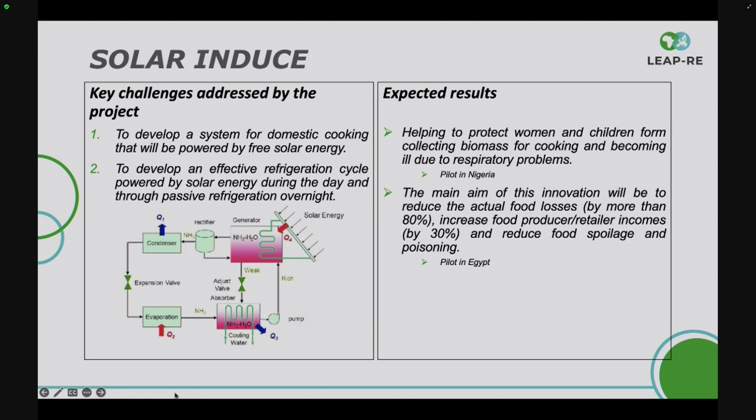Regarding the other challenge, about the solution for the cooking technology: the project is working on an already well-known solution, but the innovation here is to reduce the cost and increase the efficiency of the product. Also, one of the challenges is to design a cookware solution that increases efficiency, reducing the thermal losses of the cookware when using those appliances.

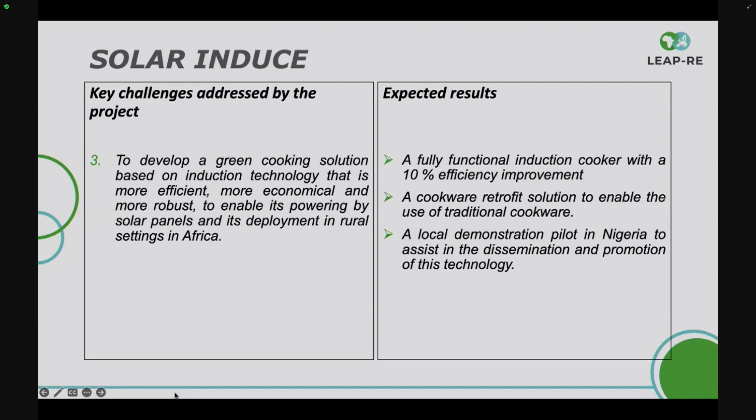When talking about what we have done in the project, I'm afraid the project has had a big delay, mainly due to funding issues for some of the partners. As I mentioned before, as a university in the UK, we don't get any funding, so we are collaborating in the training of some of the South African partners. The knowledge about the preparation of some of the products we are going to use for the refrigeration was done here in the UK.

The partner in South Africa has been working on the preparation of the mucilage using dika nut and similar crops, but they have faced some issues in finding the raw material, because it's mainly found in Nigeria while they are in South Africa. But they are still working on the preparation of the mucilage and the hydrogel.

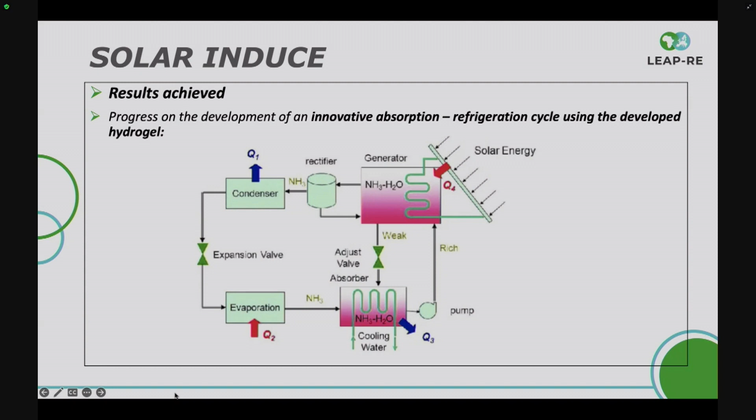Regarding the cooking part, there is no issue in the design of the solution. The partner from Spain is working on new materials to reduce the cost of the cooktop, and also working on and testing part of the off-grid solution, because generally this kind of solution works with AC current, so they are going to make modifications to reduce the cost and integrate it with the off-grid solution.

The main advance here in the project is that they have been testing new plastic materials to use in the cooktop instead of the traditional glass. Those plastics are currently being developed and tested - thermoplastic instead of glass - and how it's going to integrate other components like the touch control and those kinds of things for the cooking system.

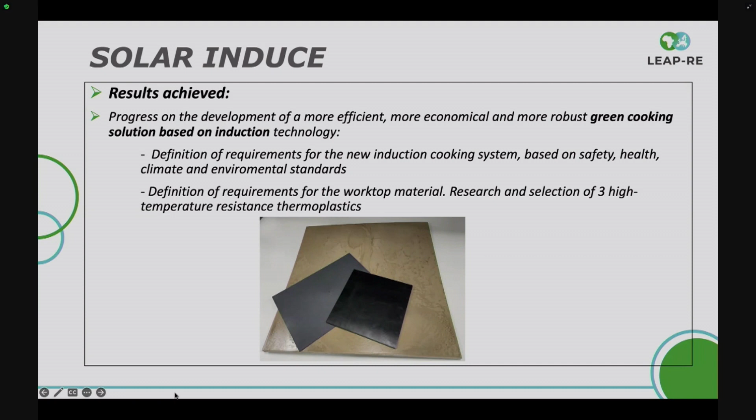Okay, so here in the picture you see the three kinds of thermoplastic, and they are currently tested for the induction cooking. Also in Spain, the partner is already testing some of the modifications of the design that they propose for this cooking solution.

I didn't mention, but the cooking solution is going to be in induction, not radiant solution. In general, induction is higher efficiency, and for that reason it's important to have the development of the cookware adapters, which is going to be developed in part by the Nigeria partner in this case.

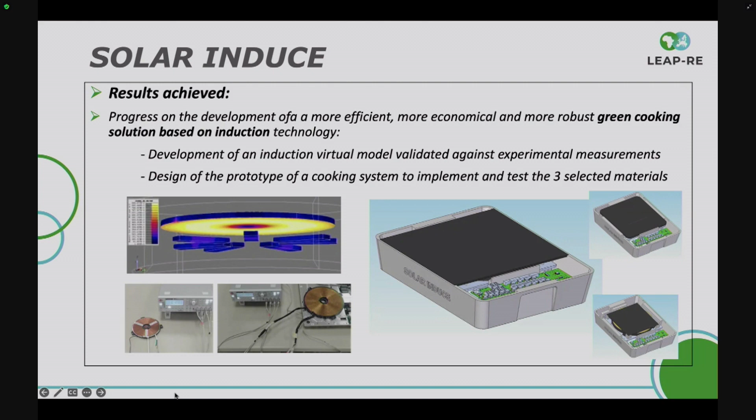Regarding the problems, as I mentioned before, there are some issues. We have an important delay in the starting of the project. This was the first one, because one of the agencies funding the coordinator was having an important delay. So initially the starting time, the kickoff of the project, was delayed more than 6 months. This is because of the coordinator funder.

Then after the kickoff—well, even before that—we already knew that UK will not receive any of the funding. So some of the tasks that were originally for UK could not be developed. We are trying to collaborate, but there are some limitations obviously. Another important issue in the project that is still not resolved is the one of the partner in Egypt—they don't have the funding. So there are still some administrative issues with the funding agency.

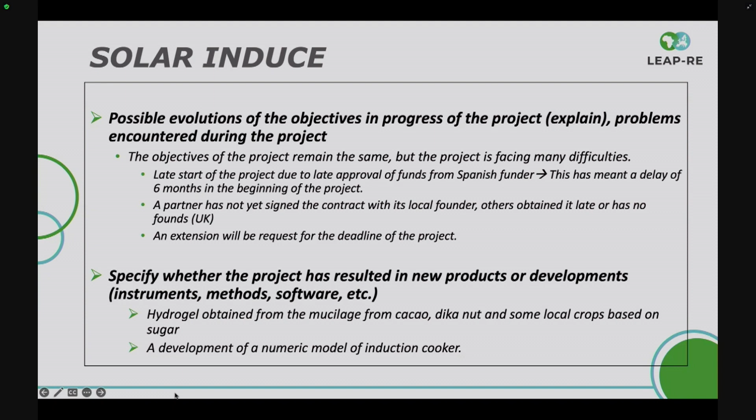Mainly due to the delays in the starting and in the funding part, we are going to request an extension. We are expecting to have the results of the project in 2025 instead of next year, but we are confident that after those administrative issues are resolved, we are going to be in a good position to complete the project according to the objectives.

Also, based on the project, we are happy that there has been some new networking and collaboration. The partner from Spain was in Pretoria, and they have developed some new collaboration there. Based on that, we have presented 2 different projects working with sub-Saharan countries—Kenya and Angola—and we were also working on that. It's still just presented, so that's not confirmed yet, but we are working to develop new collaboration based on the LEAP-RE project.

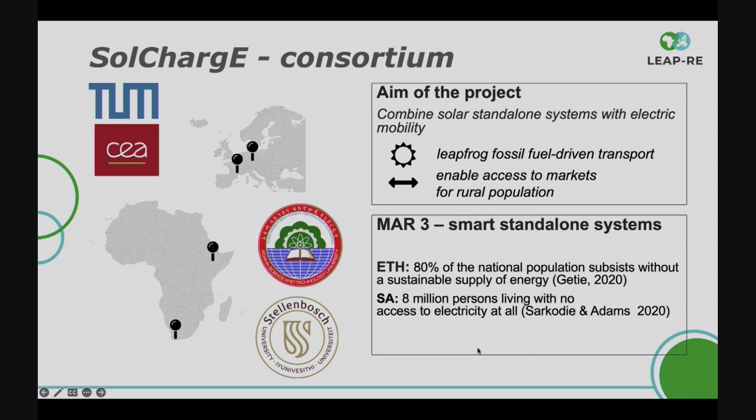Our project is related to MAR3, Smart Standalone System, with the big problem shown here by 2 examples from Ethiopia and South Africa. In Ethiopia, 80% of the national population is without sustainable supply of energy. And in South Africa, it's 8 million people without access to electricity at all.

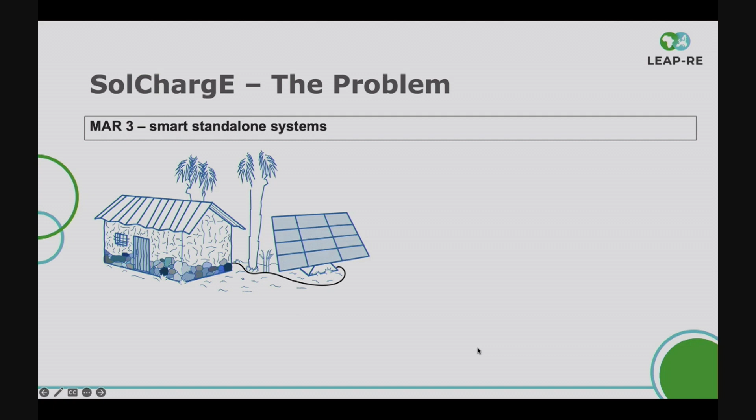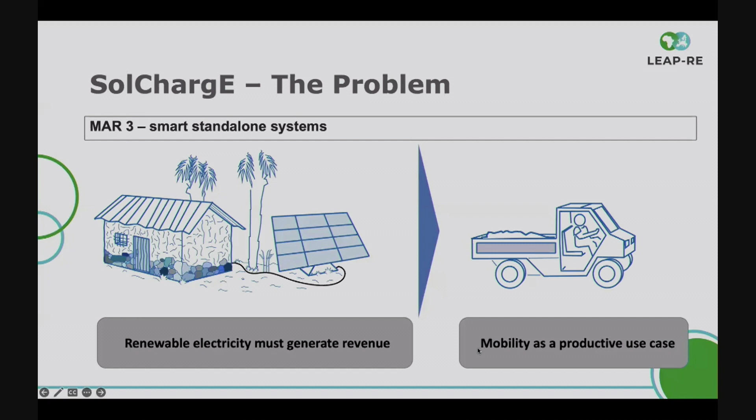We already heard quite a few productive use cases, because the big thing is renewable electricity, especially in mini grids or a standalone system, must generate revenue. However, how can we generate revenue? Usually we have big upfront costs for the whole system, so we must run the system over a long project time frame, but we should also have heavy load on it so we can sell a lot of electricity. Our use case is mobility, which is a productive use case.

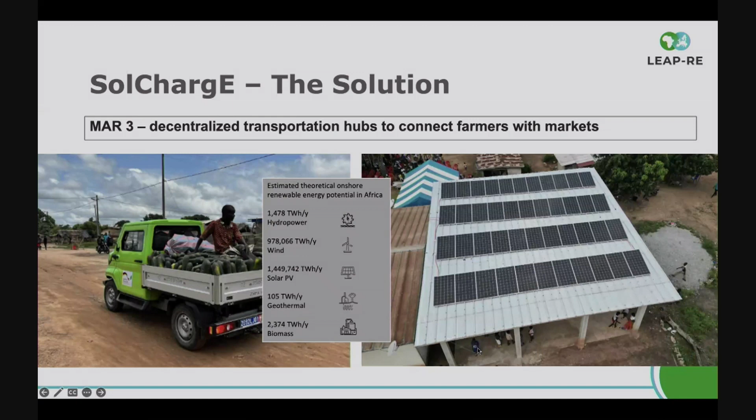You can already see the example. Our idea is to combine, for example, PV with an aCar on the left side, which is an electric transporter, four-wheel drive. The idea is to transport agricultural goods to markets from rural scenarios. Our solution is called a decentralized transportation hub, because we are able to put it basically everywhere without any grid connection, enabling access from this spot where the DTH, the decentralized transportation hub, is located, to nearby markets or big urban scenarios.

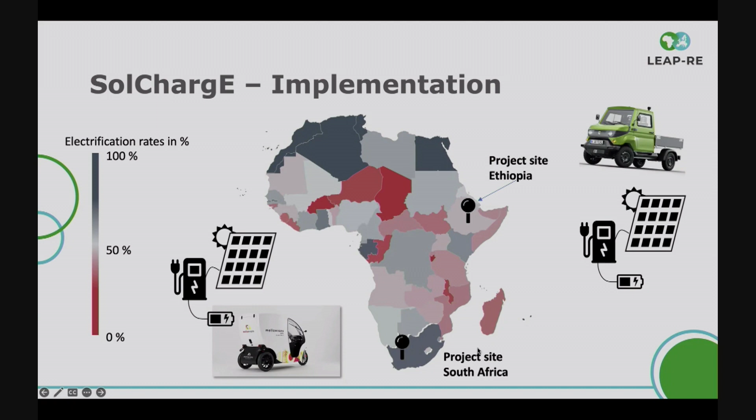You might see a difference especially between the vehicles, and the idea behind that is to show that our solution, the decentralized transportation hub, is scalable and parametric. Our idea is not just to implement it at those two sites and show that it is working, but also to give insight on how it can be adapted to circumstances that could be somewhere else.

If we look now at our work plan, our whole project is basically divided into 4 system layers. The very first is the design of the standalone charging station. The second layer is to combine it with a business model, because in the end, we see the DTH as a possible solution for investors, and we want to give an idea of how you can run such a station.

We want to train people on how to produce such a station, and also the business model in our capacity building part. And last but not least, we provide a solution with renewable energies and electric mobility. However, we still want to assess this in terms of life cycle sustainability. And therefore, I want to give over to my colleague Arif on the design of the charging station.

Okay, thank you Dr. Nian. Here we support the ASTU for designing the SASCS.

With the ASTU data specification, we presize the configuration using PVsyst. In the first step, we define the coordinate of the site where the SASCS will be installed. In the Ethiopian location, we set this coordinate for obtaining meteorological data used in the previous simulation. Next, we determine the orientation of the PV modules, which will be installed with a 15 degree tilt facing south.

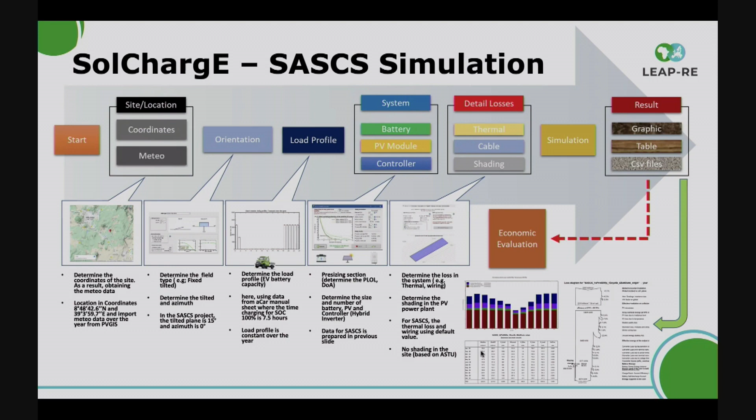In our scenario, we found the SASCS that recharges 100%, where the missing energy is 0. However, the system will waste much energy, which we call unused energy. Also, in terms of installation and investment, the system is very expensive.

Considering the missing energy, unused energy, and investment, we recommend installing the SASCS with 16 PV panels and 8 batteries for the first scenario, 10 PV panels and 4 batteries for the second scenario, and 14 PV panels and 8 batteries for the third scenario. Okay, thank you, next.

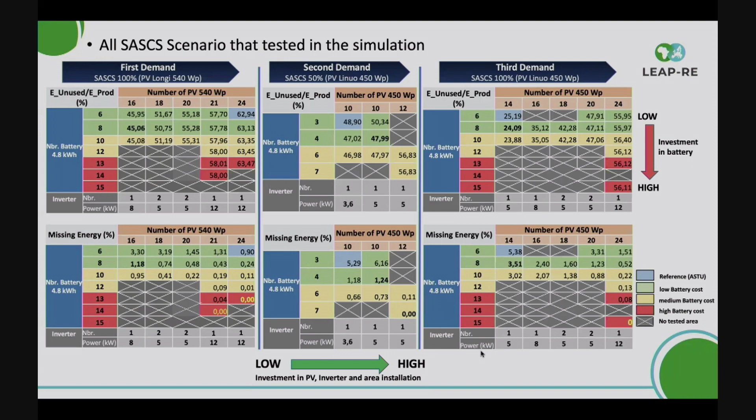We've purchased our own EV, as Corby mentioned, it's called the MellowVan. It's a locally manufactured tricycle system, mostly suited to urban last mile delivery applications.

We've made progress in prototyping the charging station to charge the MellowVan. The philosophy we followed is to implement a solution that utilizes easily available and non-specialized components, to ensure the design can be easily reproduced all over the world. It also makes implementation easier in case any components are not easily available, as they can be substituted with an alternative manufacturer. That was our philosophy there.

The main components of our system include the PV panels for the energy. We make use of a maximum power point tracker to ensure the PV panels are always at their maximum power point. We use a charge controller to ensure the battery is charged efficiently and safely, and a battery for storing energy during periods of low sunshine.

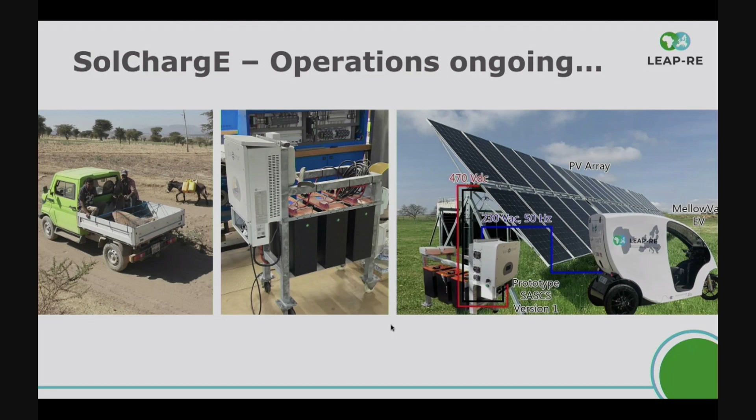We've tested the system and it's been found capable of charging the vehicle as necessary. We're currently busy developing version 2 of our charging station, which will be far superior to this one, hopefully completed by the end of this year. Thank you. Next slide, please.

As you saw, we are trying to work in parallel as much as possible. We also had a few funding problems in the beginning, or still have, and problems we need to tackle from sourcing. However, our approach is to try to work in parallel and do small steps iteratively. As Melly already said, our main idea for the whole system is to make it adaptable wherever it is needed. Together as main contributors, Stellenbosch University already published development guidelines which can be used for sizing such a system, and we also showed one part of the simulation at the EU PVSec conference.

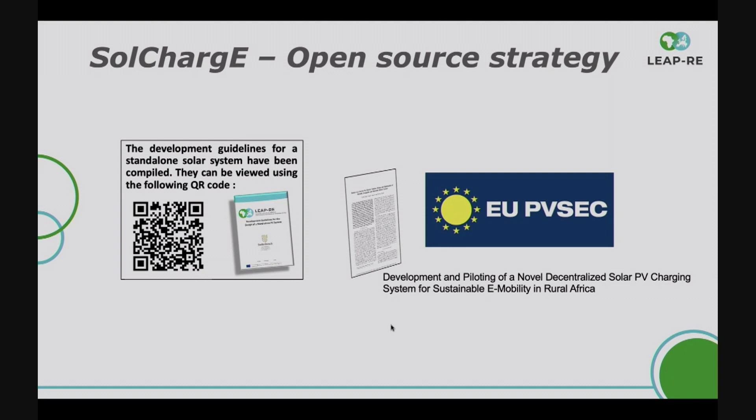So what's next? As you saw, our idea is basically a decentralized transportation hub, which is very off-grid in rural scenarios, supplying electricity for mobility.

However, we got a new case or idea, which we are currently developing in a student project together with Stellenbosch University. Our idea is to add electric tractors to our decentralized transportation hub in order to also produce goods, and therefore we try to push this topic and research which productive use case really makes sense in order to make such a decentralized transportation hub economic. Thank you.

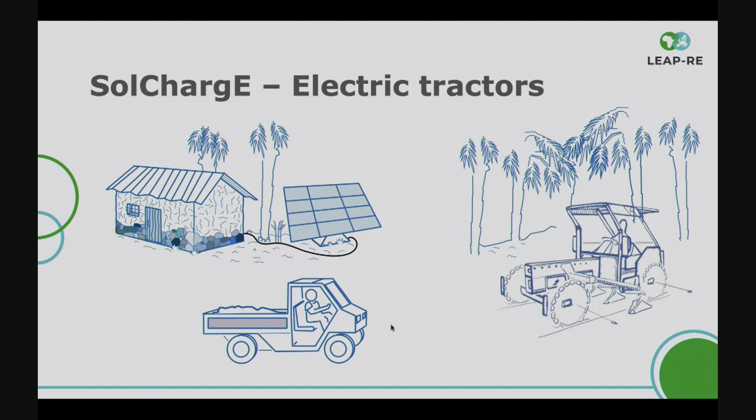Thank you, Corbinian. Thank you both for the presentation. So we'll take a question in the room, not too many, and short questions because we are late on the agenda. So where I am looking, I will hope I didn't discourage you from any question.

Yes, one, Anjali there. Well, thank you very much for this very interesting presentation. What I was wondering is, do you have any numbers in terms of what would be the capacity for one such transportation hub? And what kind of agricultural vehicles are you envisaging? You've talked about a tractor and small trucks, so what's the technology we're actually looking at, and what would be the capacity of these machines?

Thank you for the question. Unfortunately, internet was gone for a short time, however I think I understood it. I think your question was, what's the capacity of such a decentralized transportation hub? Our idea is to have a minimum of one vehicle, which can basically transport all over the day. However, there might be a sweet spot at 2 or 3 where we can make the DTH more economic due to economy of scale with the PV system and the stationary batteries, but that's still under research. The question was also about the type of agriculture vehicle you envisage.

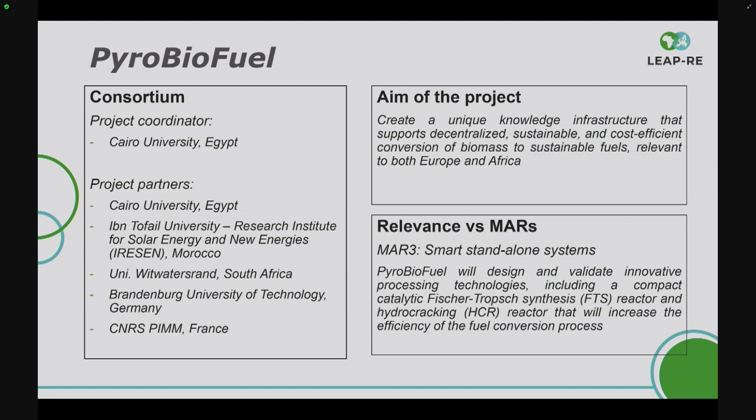The aim of our project was to create a unique knowledge infrastructure that supports decentralized, sustainable, and cost-efficient conversion of biomass to sustainable fuels relevant to both Africa and Europe. Pyro-biofuel will design and validate innovative processing technologies, including a compact catalytic Fischer-Tropsch synthesis reactor and a hydrocracking reactor that will increase the efficiency of the fuel conversion process. So we would like to create a new fuel.

What were the key challenges addressed by the project? Of course, increasing the availability of advanced biofuels and energy in Europe, the EU, and Africa through inexpensive standalone systems. Also, the introduction of tailored technologies using local renewable sources, because we have lots of agricultural waste in Africa and in Europe, so we'd like to use this. This was a challenge - for local use of population and economy to give them new chances, to strengthen the European and African technology base, and accelerate development of sustainable fuels to replace fossil alternatives.

Development of technical and managerial competencies and capacities in the area of biomass conversion, because not everybody is aware of that. And of course, in Egypt and in Morocco, we had the currency devaluation due to the international crisis happening and the war and everything.

The late delivery of equipment was a challenge, and the export problems sometimes are challenges.

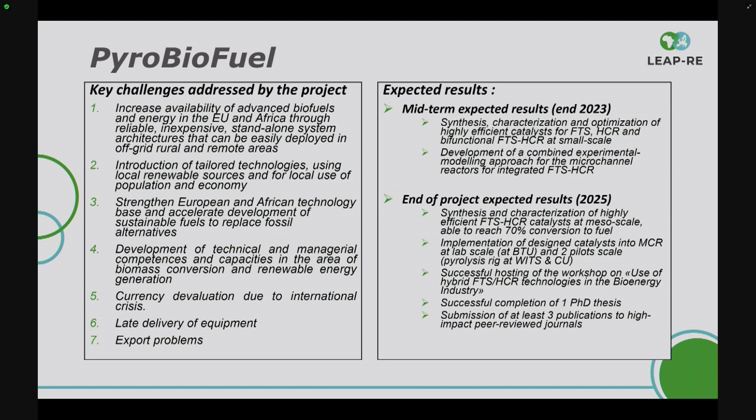The implementation of the design catalyst and the experimentation of the pyrolysis at the micro scale at the labs in Morocco and in Egypt. Numerical modeling of the processes done by life cycle analysis, this will be at the IRESEN.

Validation of the integrated biomass to fuel conversion, this is what we will do on our pilot scales. We are going to upgrade the bio-oil. The techno-economic analysis and life cycle analysis will be done between all of us.

The socio-economic impact study of biomass pyrolysis, because this will help women get more jobs and open new markets. As repeated here, to have successful completion, a postdoctoral training, submission of 8 publications, and to host 5 successful workshops.

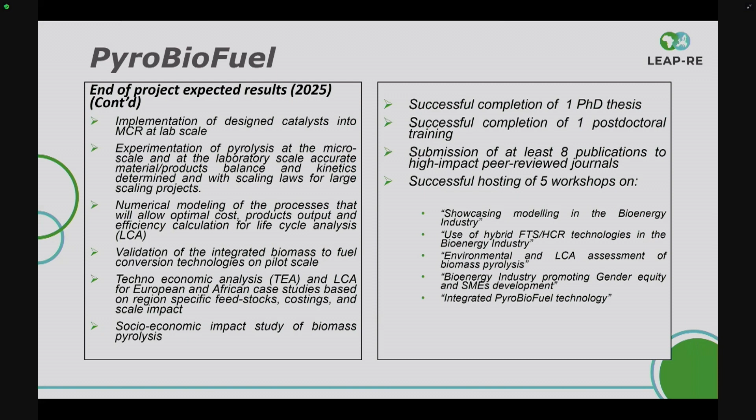These were our activities. We had periodic online meetings carried out between all the partners.

We had attended, Professor Toko Mazoji from South Africa attended the LEAP-RE first stakeholder forum in Pretoria in October 2022. We had the kickoff meeting in Cairo in November 2022. We participated in COP27 in Sharm el-Sheikh, Egypt, in November 2022, with a poster joint between WITS South Africa and Cairo University.

We are all working together. We had this poster on production of biofuel and potable water using agricultural waste. We participated in the IEA Bioenergy UNIDO online workshop on the 22nd and 23rd of May 2023.

We had a meeting between the PyroBioFuel partners in Paris, at the Laboratoire de Procédés et Ingénierie en Mécanique et Matériaux in Paris, in September 2023. Unfortunately, I couldn't attend because I had a problem, but I came back. I was with the professor in Paris, I'm just back.

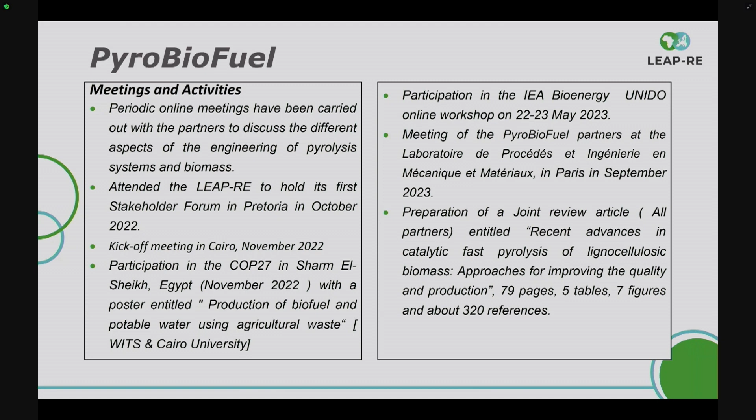The recent advances in biomass pyrolysis processes and bioenergy production, also the thermodynamic analysis. Some of these are collaborations between Cairo University and WITS.

We also have one on biofuel production from camel thorn biomass using the pyrolysis process. It was presented at a Hungarian, Polish, and Czech conference. Another one, the workshop by the German counterparts, they attended in Germany on sustainable aviation fuel design, because they are developing their fuel, and another one also in Berlin. All this is on green and sustainable fuel from syngas via the Fischer-Tropsch synthesis process.

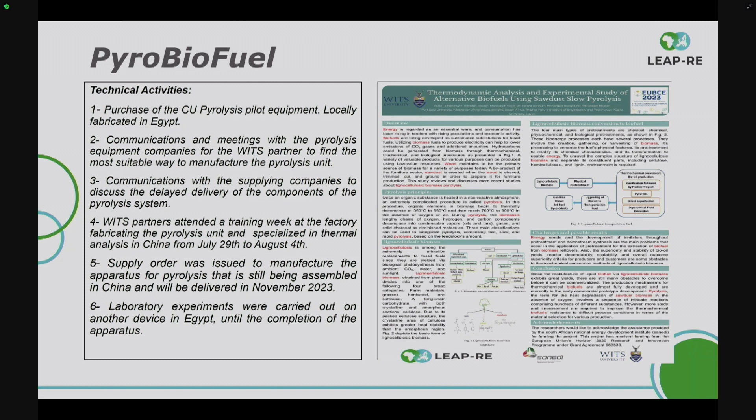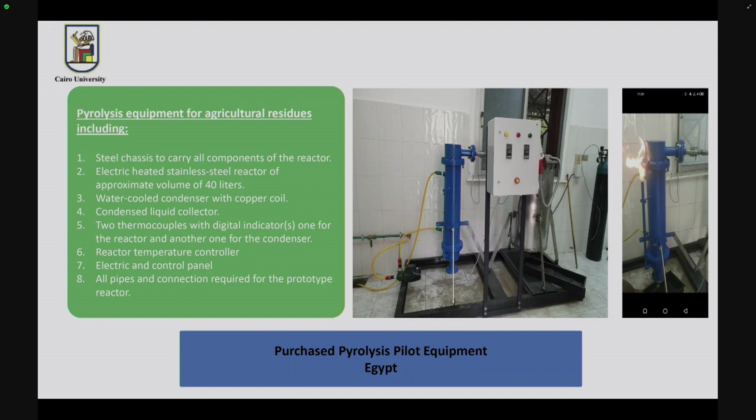These are some of the presented work from Brandenburg. We are working very hard to test the temperature and the catalyst they are putting in, because before this they had two separate catalysts, one for Fischer-Tropsch to use the syngas, and another for the heavy oil to do the hydrocracking. What we aim to do is not to produce the heavy fuel we obtain, but to convert it into a lighter fuel, free from sulfur since it will be from agricultural waste, so it won't cause corrosion or sulfur emissions on burning.

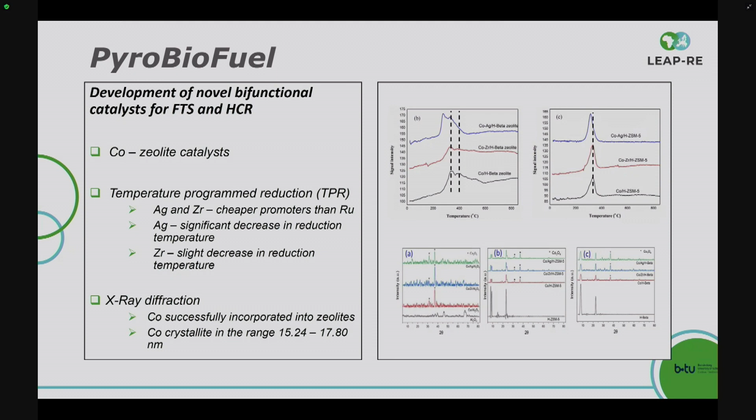So they are preparing the new one to upgrade the bio-oil produced. They will do their own upgrading, and we will do ours in Egypt.

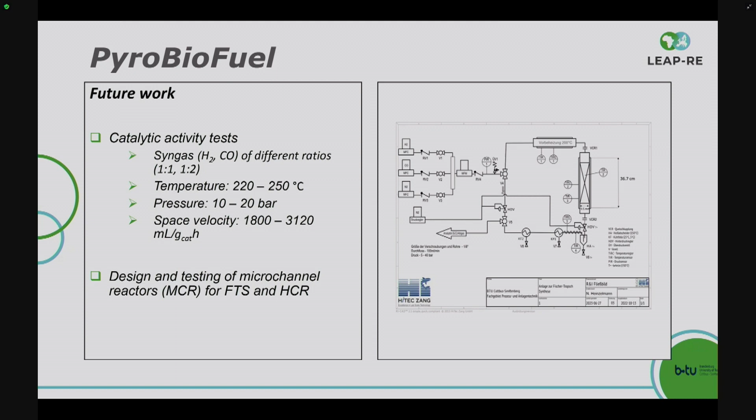This is future work they are thinking of, to test the catalytic activity of the catalyst and adjust the syngas ratio between hydrogen and CO at different ratios and temperatures. At the bottom they are thinking of the design and testing of the micro channel reactor.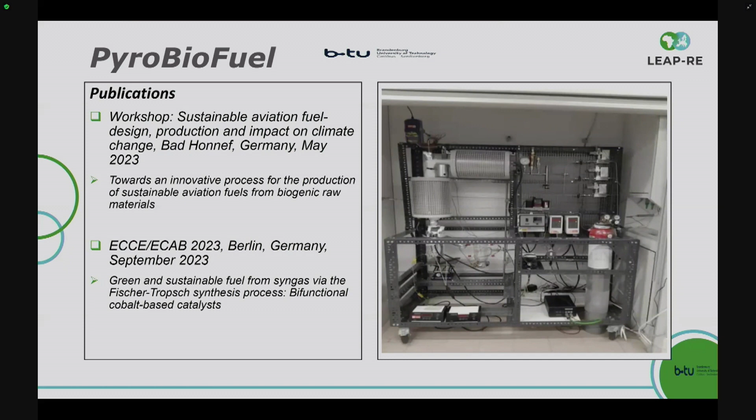They have collected the data on the transport and the type of biomass used. This is the literature review they are doing, thinking of the feedstocks, then the process, then the end product and the different fuels that they may obtain.

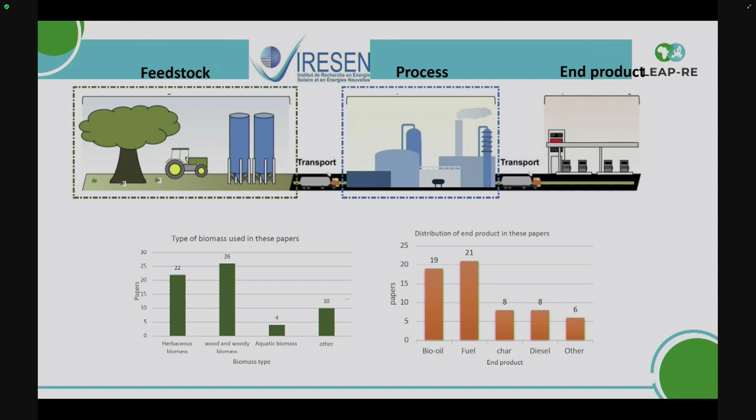They are announcing their first results. For the time being, they did not submit a paper or a publication.

Regarding Ibn Tufayl University, what they want to do is they have announced they want to recruit a postdoc to work on the pyrolysis equipment. He may even come to Egypt. Also, they are waiting for our results to do the simulation and modeling on the Moroccan side.

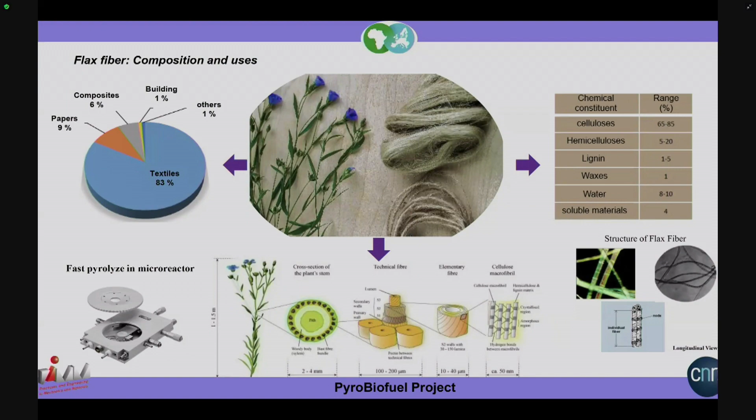What we see next is the flax fiber. They work on this at the CNRS. It's a biomass, and they want to see, if they do the micro pyrolysis, how the fiber will shrink, how long it will stand the heat, and the effect on the thermogravimetric test on cellulose and hemicellulose.

When I was in Paris a few days ago, I brought them flax fibers from Egypt to do the comparison, as well as some fibers from agricultural waste too. They have also recruited a postdoc working on this, and it will give good results.

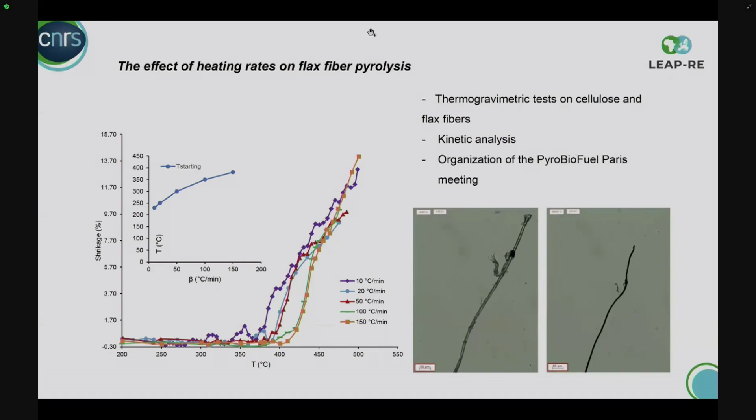And at the end, I thank you for listening to my presentation. I'm sorry again for my late presentation. Okay, thank you.